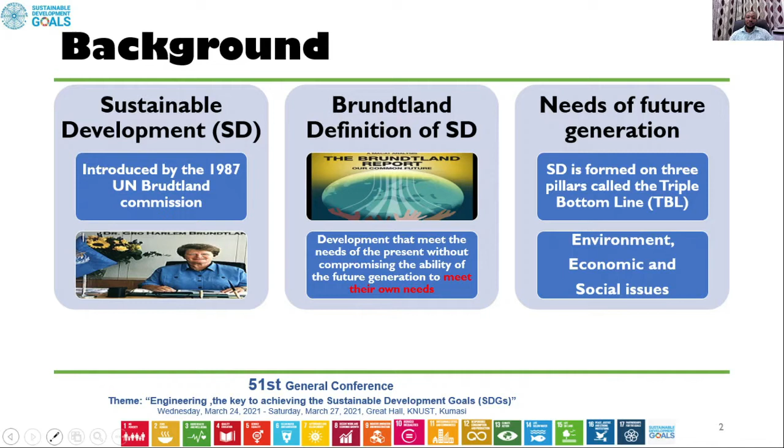To the background, sustainable development was introduced in 1987 by the United Nations under the Brundtland Commission. Dr. Brundtland was the former Prime Minister of Norway. Her definition of sustainable development was any development that meets the needs of the present without compromising the ability of future generations to meet their own needs. So the needs of the future are captured as issues that are beneficial to the environment, economic and social problems. People call these things the triple bottom line.

Sustainable development remains a top priority for the member states of the United Nations, and we know that as of now, the United Nations have produced a document called the Sustainable Development Goals.

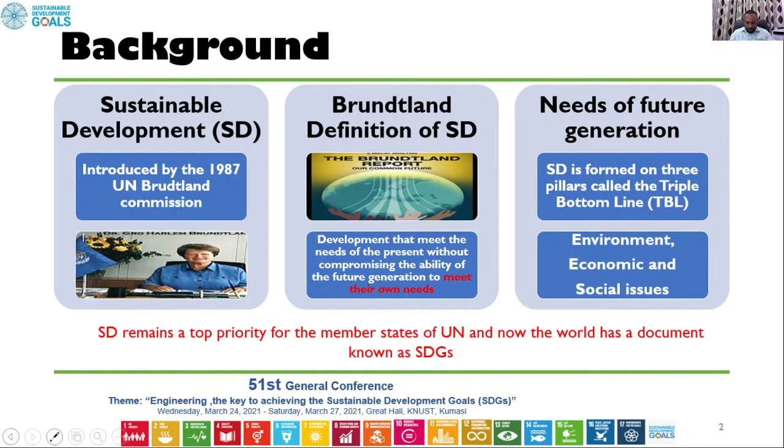Greenhouse gases are a very important issue when it comes to sustainable development. We know that they govern global warming. These gases are global anthropogenic gases, meaning they are caused by human activities. Examples of these gases include carbon dioxide, water, methane, NOx, and sulfur dioxide.

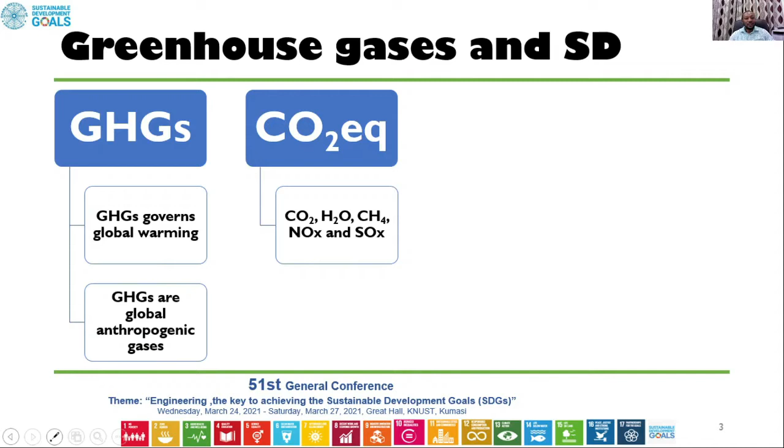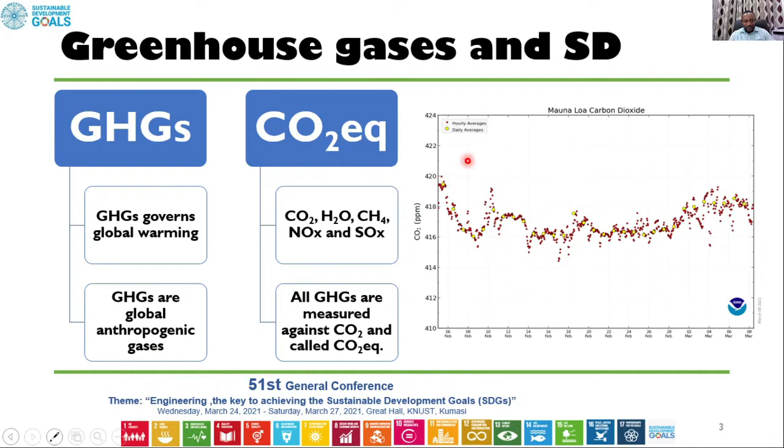All these gases are benchmarked or measured against carbon dioxide, and we call it the carbon dioxide equivalent. As of the 8th of March, I picked the carbon dioxide concentration on Earth, and we are having a daily average of over 415 parts per million.

The trend of carbon dioxide emission before 1950 was below 300 parts per million, but now we are rising and rising and rising. After 1950, which was characterized by the industrial revolution, we saw a rise in carbon dioxide emissions or carbon dioxide concentration in the atmosphere. So there is a relation between the concentration of carbon dioxide and the temperature on Earth.

In 1880 we were lower, the Earth was having about 0.1 degrees Celsius. In 2019 we've risen up to about plus 1.1 degrees Celsius. So you see that as the concentration of carbon dioxide increases, the temperature on Earth also increases.

Climate scientists are warning against the increasing content of carbon dioxide in the atmosphere. They are saying that above 550 ppm, we could witness unbearable conditions on Earth.

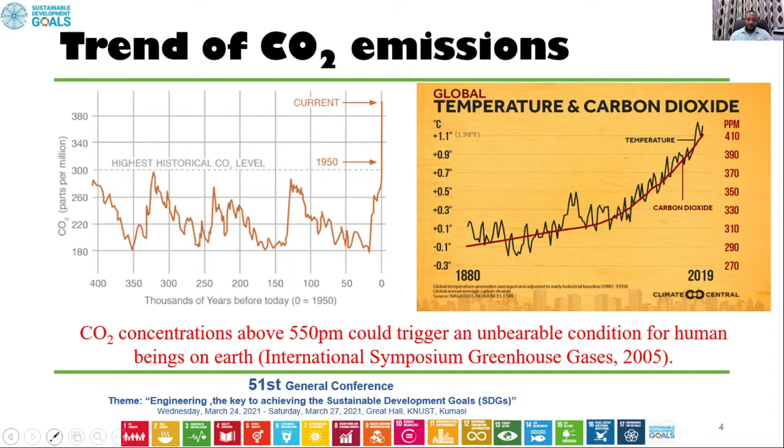These are some of the indicators of carbon dioxide emissions. We are having rising sea levels, cities are washed away by flooding, rising air temperature on land. It's been recorded that two years ago California witnessed about 54 degrees Celsius, and it created a lot of problems. Cars on the streets were melting, signages were placed at vantage points indicating that those places are no-go areas.

So we have increasing temperature on sea surface. We're seeing cyclones happening in many parts of the United States and some areas in Asia, Indonesia.

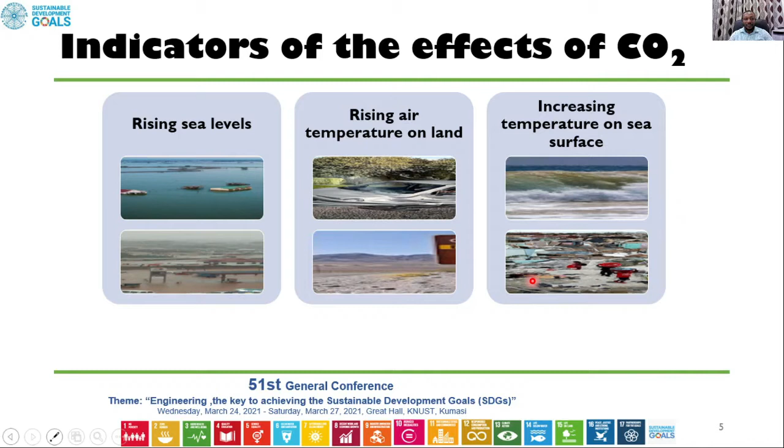These things create an urgent need to reduce the amount of carbon dioxide entering the atmosphere. And if possible, researchers are advocating for what we call net zero emission by 2050.

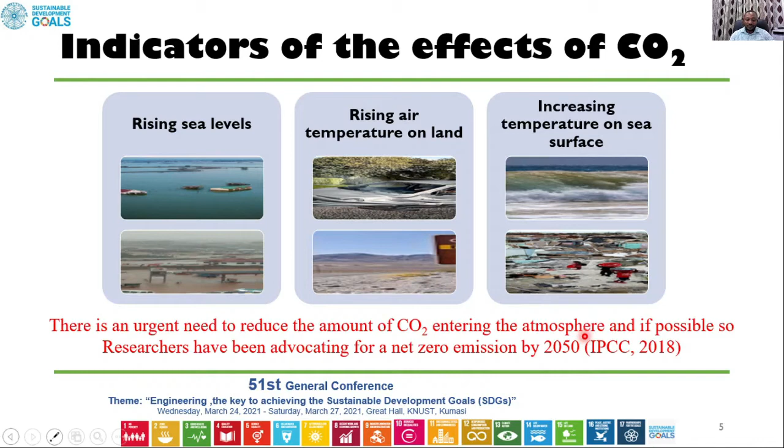The importance of decarbonization strategies have led to two billionaires speaking so much on the effect of carbon dioxide on the atmosphere. Elon Musk is one example. Bill Gates has also launched a book entitled How to Avoid a Climate Disaster. All these things show that people are placing higher priority on carbon dioxide content in the atmosphere.

So concrete has a relation to carbon dioxide generation. Concrete is the most widely used construction material on earth. Over 10 billion tons are produced annually, and this generates between 4 to 8% of world carbon emissions.

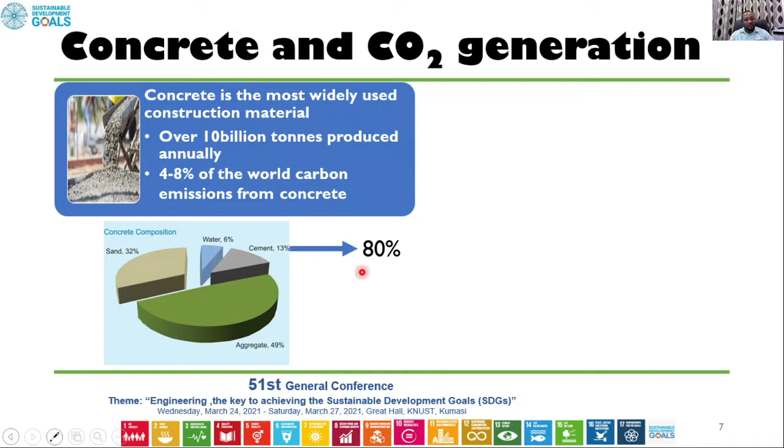These are the constituents of concrete: sand, aggregate, cement, and water. The interesting thing is that cement generates about 80% of carbon dioxide in concrete. The remaining 20% comes from the rest of the materials.

So one will make a case that if you had to use other materials like aluminium and steel, materials with high carbon content, we will create problems for the world.

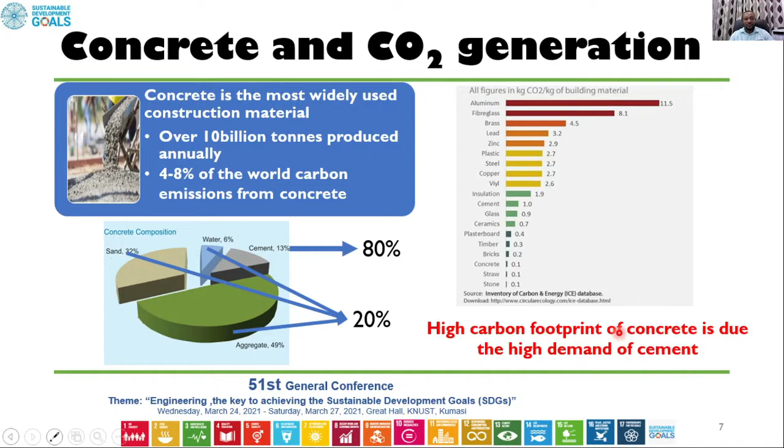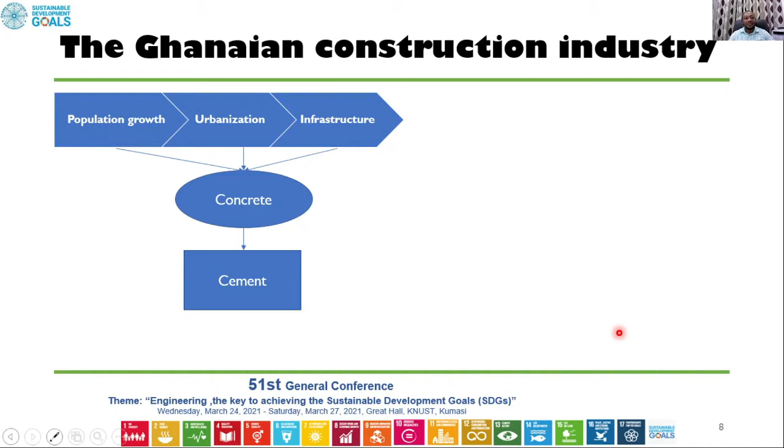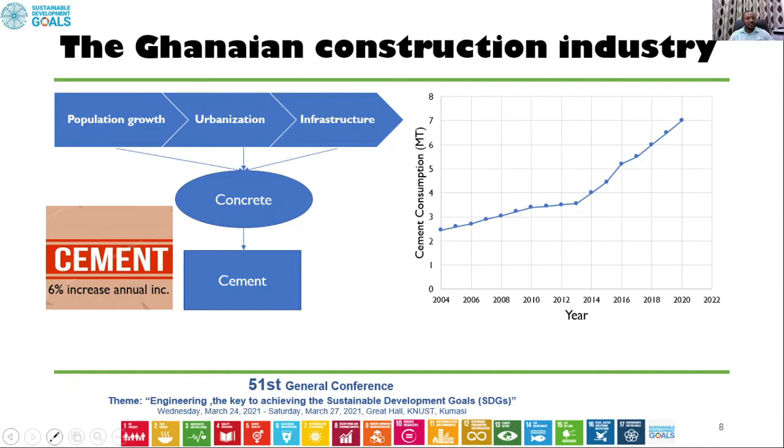The Ghanaian construction industry has three major issues that demand so much concrete: population growth, urbanization, and infrastructure. All this concrete needs cement. The trend of cement consumption from 2004 to 2020 keeps increasing. Now we are around 7 million tons, and annually it is increasing by 6%. The high demand for cement for infrastructure development in Ghana makes the cement and concrete industry a rich target for decarbonization solutions.

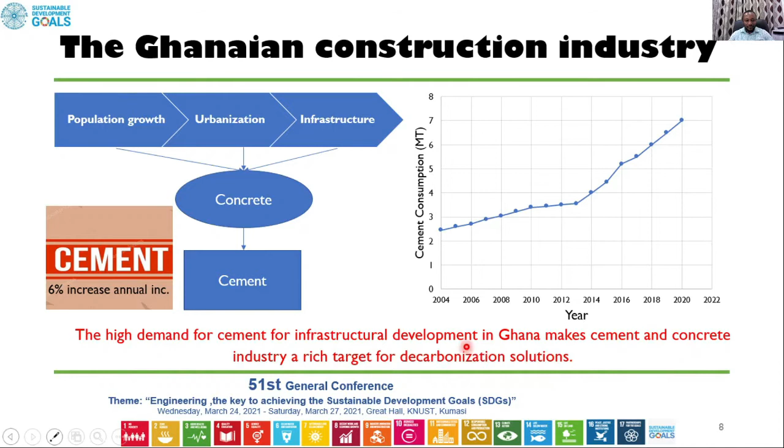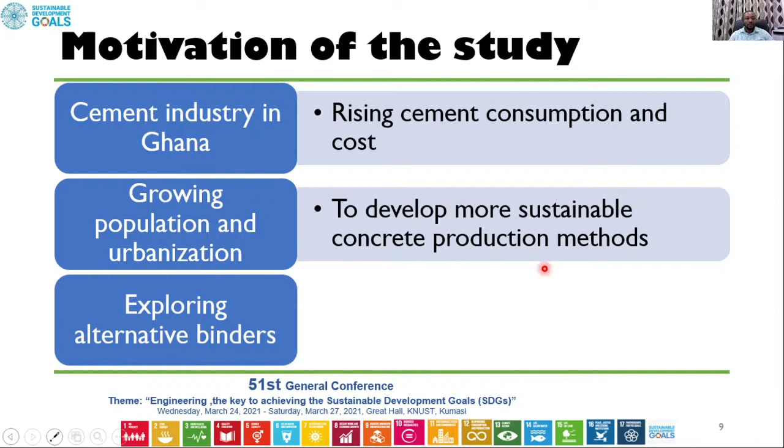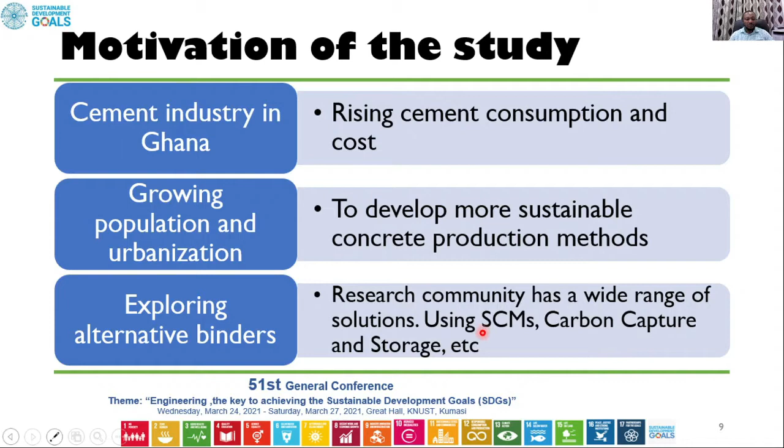So I have three motivations for the study. Cement industry in Ghana keeps increasing, with rising cement consumption and cost. We need to develop sustainable concrete to meet the growing population and urbanization of the country. We also need to explore alternative materials. Some countries use carbon capture and storage, but it is very expensive for us as a developing nation, so we can go for probably sustainable construction materials instead.

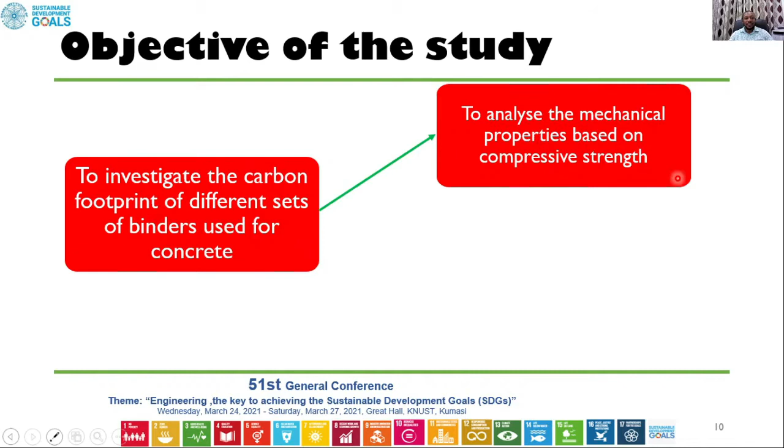The main objective of this study is to investigate the carbon footprint of different sets of binders used for concrete. But before achieving that, I did a compressive strength analysis, which is a mechanical property, and then I performed the life cycle analysis of the different concrete mixes done in this work.

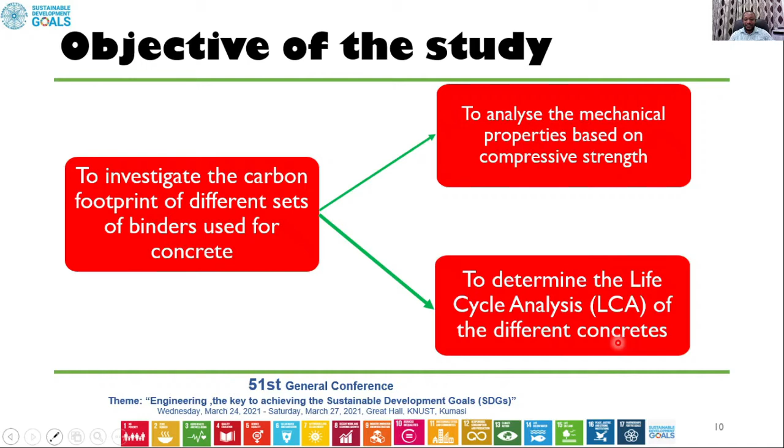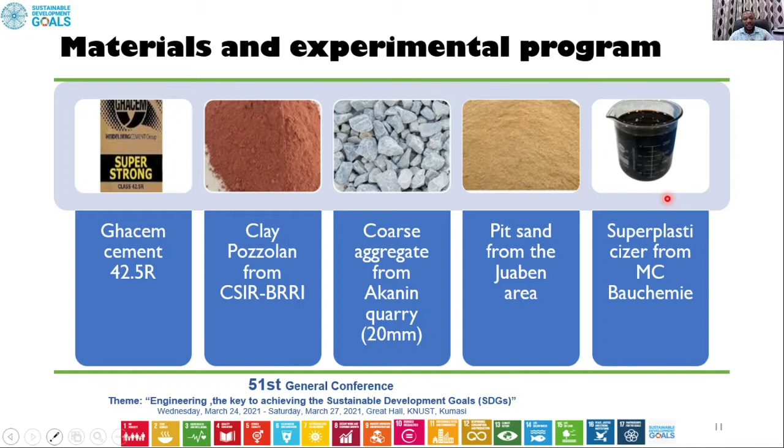These are my materials and experimental program: Ghacem cement 42.5R, Pozzolan obtained from BRRI, coarse aggregate from the Akanin quarry, and pit sand obtained from Juaben. This is super plasticizer, which is not common in our concrete in Ghana. We call it a high range water reducer. It is a game changer—it changes the properties of concrete, enhancing the strength and the chemistry of the concrete.

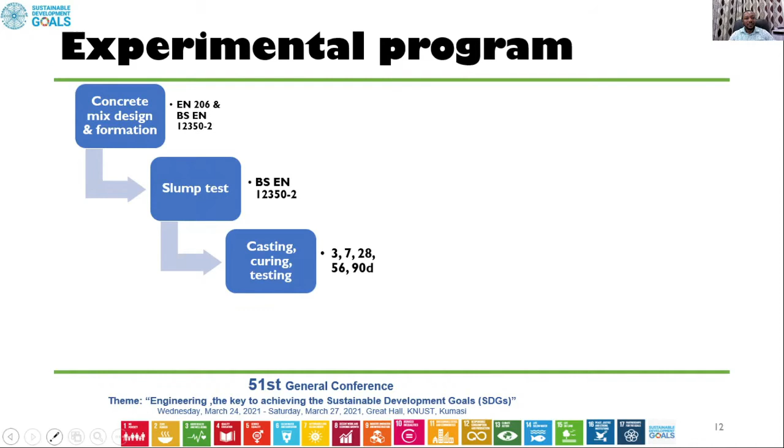For the experimental program, we did a concrete mix design using the EN 206 standard, and then formed the concrete using the BS EN method. We performed the slump test in this work, working with S3, meaning the slump should be between 100 and 150 mm. We performed casting of the concrete and cured it at 3, 7, 28, 56, and 90 days.

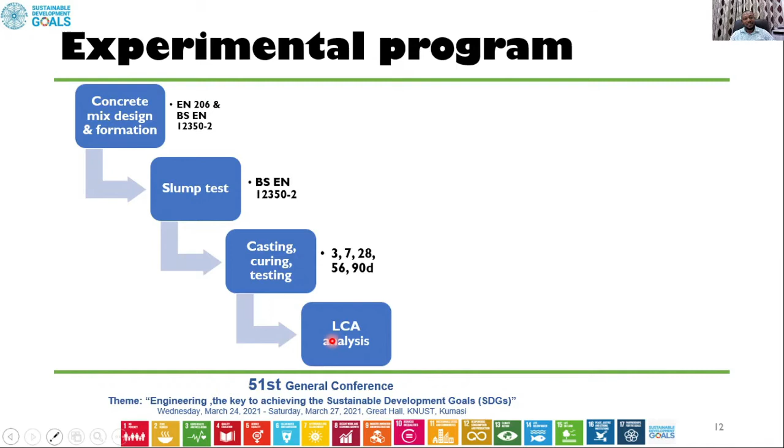After all these things were done, we performed a life cycle analysis. Before anybody can carry out a life cycle analysis, you need to understand four basic things: you have to define your system boundary, your inventory of where you're going to pick your data from, how you're going to do the impact assessment, and then interpret it.

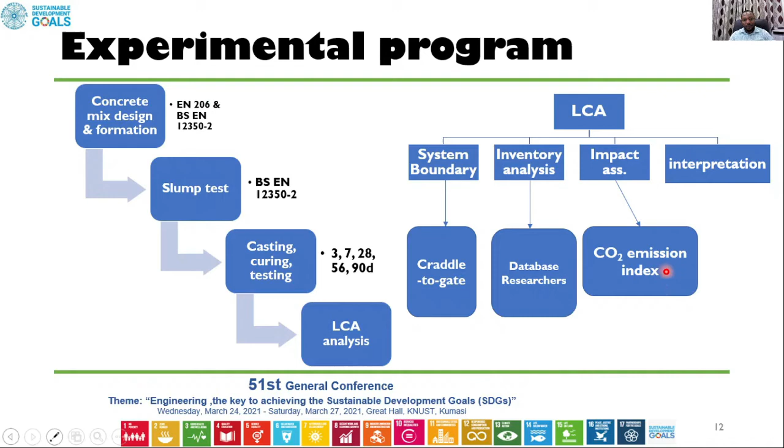So we have cradle to cradle, we have cradle to gate, and we also have databases around you can pick from. Researchers have also produced their own figures and data with respect to some construction materials. In this work we use a carbon emission index to interpret our work.

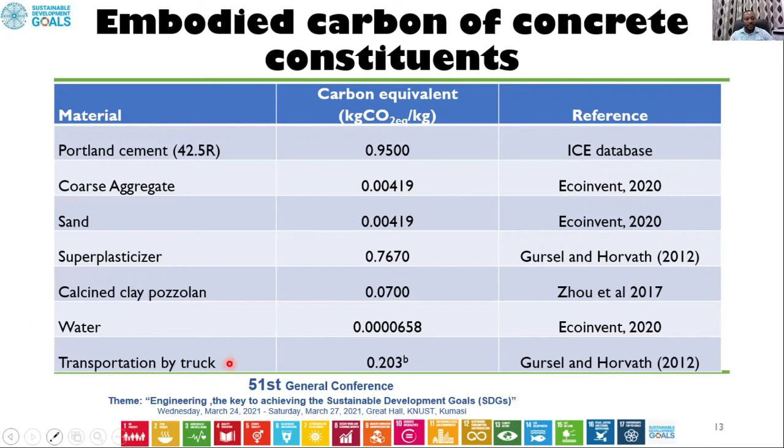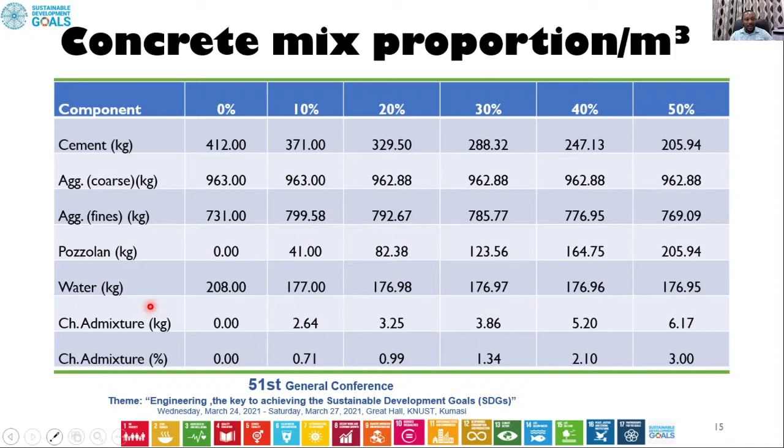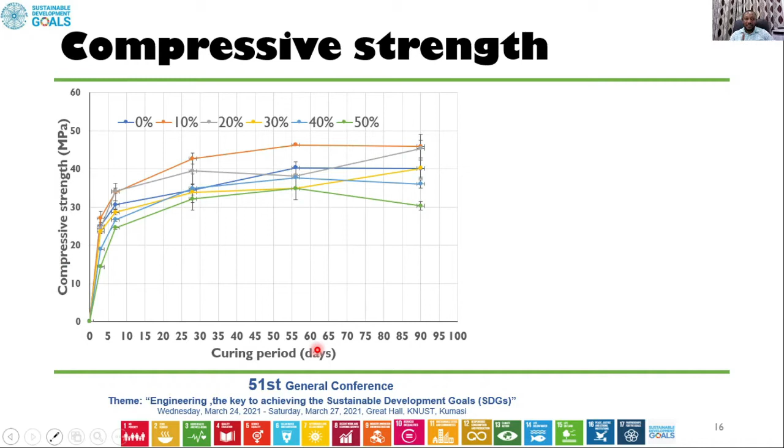This graph shows the compressive strength against curing period. Five key things are noted from this graph. Number one: the 10% mix was 8% higher than the control at 3 days. The control line is the blue line running through, and the 10% was higher by 8%. The rest were lower.

At 7 days, only 10% and 20% exceeded the control, the rest were lower. At 28 days, we have 10% and 20% exceeding the control, but 30% and 40% were almost similar to the control concrete, whereas 50% was lower than the control mix.

At 56 days, we also realized it was only 10% that was higher than the control, while 30% and 40% were marginally lower than the control mix, and 50% was also lower than the control mix. At 90 days, the 10% and 20% had superior strength compared to the control, and the 30% concrete mix was almost the same as the control concrete.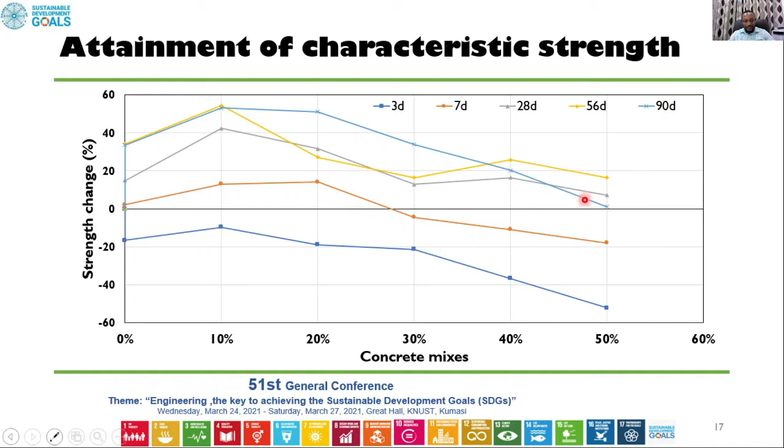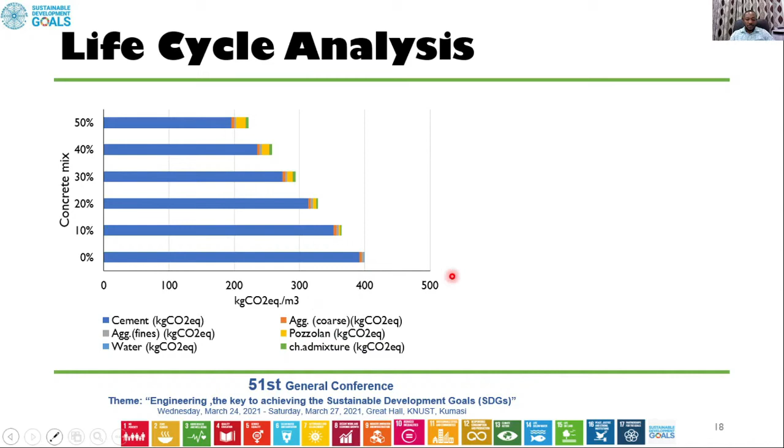Let's look at the life cycle analysis. The graph is plotted between concrete mix and the kilogram carbon equivalent per meter cube. These are the key points to note: the highest emission was the OPC concrete, meaning it doesn't contain any Pozzolan. That was very high, around 400 kilogram carbon equivalent per meter cube.

There was a progressive reduction of carbon emission with increasing Pozzolan content. As Pozzolan increased from 0 to 50, the carbon dioxide content decreased. They were all decreasing.

Again, there was also marginal emission from other constituents compared to OPC. The other constituents, that is coarse aggregate, fine aggregate, and water, were marginal; the difference wasn't that much between the OPC and the other constituents, as you can see compared to the OPC.

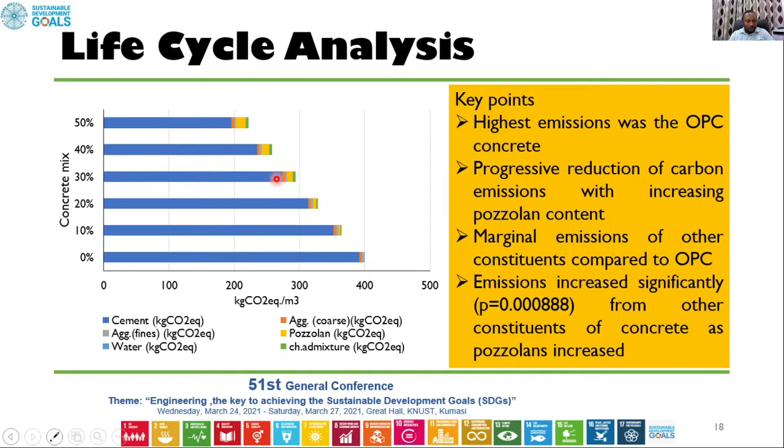And then as the pozzolan also increased, the carbon content of the other constituents were also increasing. You can see it started very low, then it was increasing here, and increasing here, as pozzolan content was also increasing.

We also performed the carbon dioxide emission and total emission index, indexing the carbon content against the 28-day strength and the 90-day strength. The blue line shows the total embodied carbon content of the material, and the orange color shows the index.

Look at the trend. At 0% there's no pozzolan, but as we incorporated the pozzolan content, both the total embodied carbon and the total carbon indices were decreasing, and the decrease was very high when the pozzolan content was also high in the concrete mix.

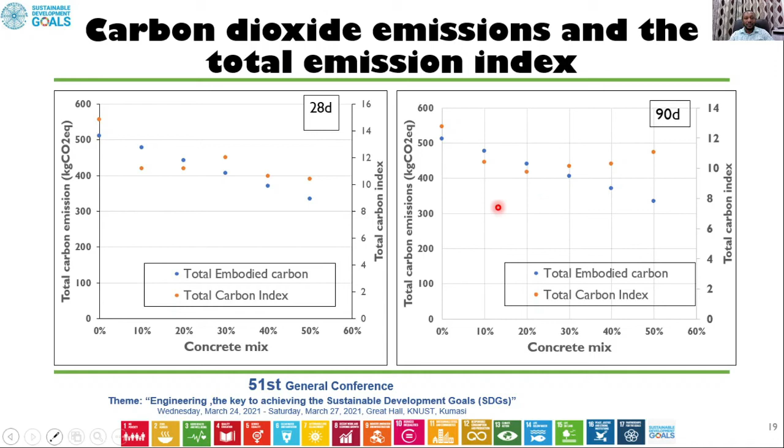It was very similar to what happened at the 90-day curing period.

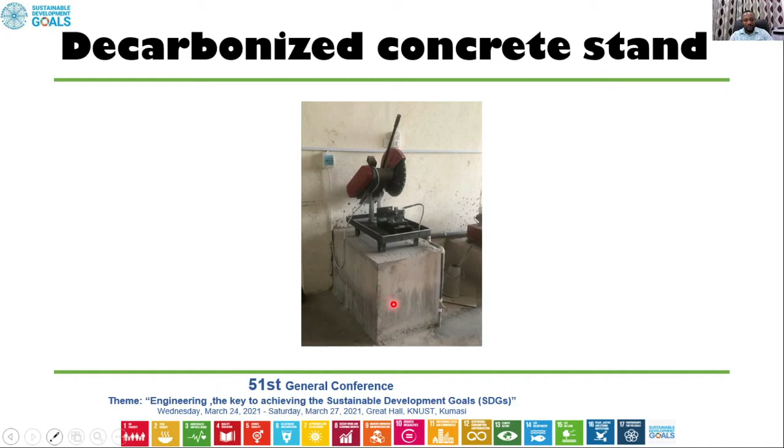After all these things were done, we tried to practicalize the mix. We mounted this concrete cutter on this stand, and this stand was made from a concrete mix containing 50% pozzolan and 50% cement, and it was a C30 concrete.

These are the conclusions I made from this study. Number one, the binder made using 50% cement and 50% pozzolan obtained compressive strength of approximately 32, 34, and 30 MPa at 28, 56, and 90 days of curing. These results were higher than the characteristic strength of 30 MPa.

Number two, the embodied carbon of different concrete mixes progressively reduced with increasing pozzolan content in a cubic meter of concrete. The OPC had an embodied carbon of 399, whereas the 50% concrete mix, which was the lowest among the concrete mixes, had 222 kilogram carbon equivalent.

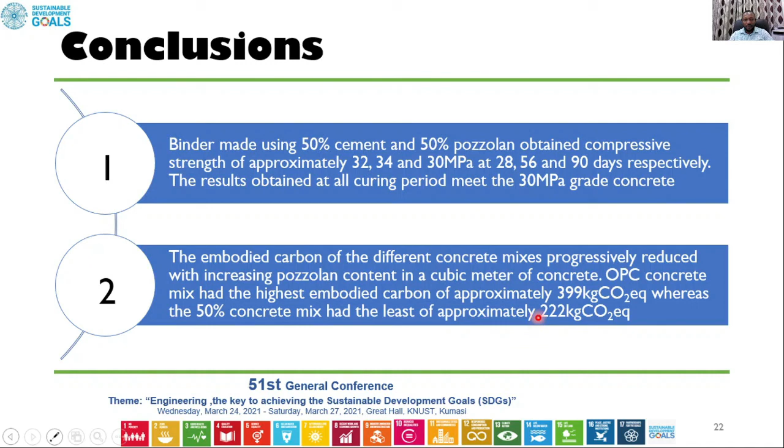The third point: when we consider the transportation scenario, it actually increases the total carbon emission of the product. The fourth point: the carbon emission indices of pozzolan concrete mixes at 28, 56, and 90 days of curing were lower in the pozzolan concrete than the OPC concrete.

These are some of the recommendations I made from the study. In the future, we're going to look at some mechanical properties that include flexural strength, static and dynamic modulus. We've procured an equipment that can do that, called the ultrasonic pulse velocity equipment.

Then we will also perform durability tests. We will look at the transport mechanism using an equipment called rapid chloride permeability test to look at chloride movement in the concrete. Then we have an equipment called surface concrete resistivity, which we also use to look at the property of the concrete.